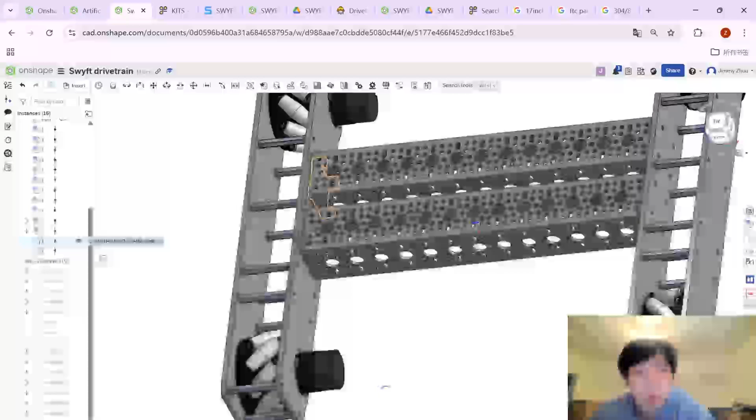Move the bar, the timeline bar. Where's the timeline bar? I mean, I guess it's still loading, so the timeline bar hasn't appeared yet. But assume it's working. Just refresh this.

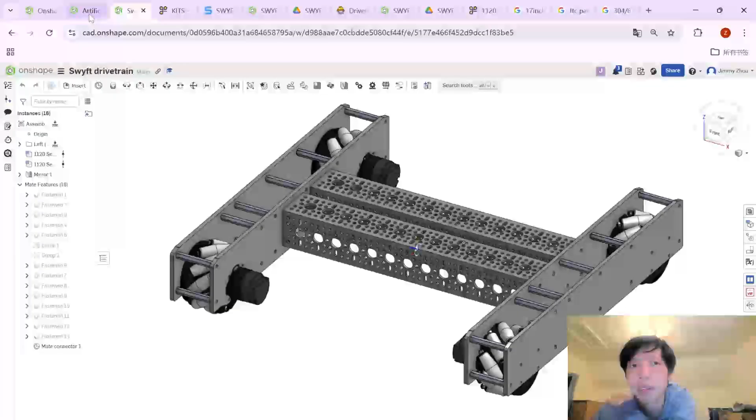Meanwhile, let's see motion, not structure. For a channel, for a 10-hole channel, or no, let's say we can just do a 12-hole channel. So 312. So we can replace this. Replace this by a 12-hole one. So this is the fun thing about Onshape, is that you can just replace parts that you don't like by another part that you think is going to work.

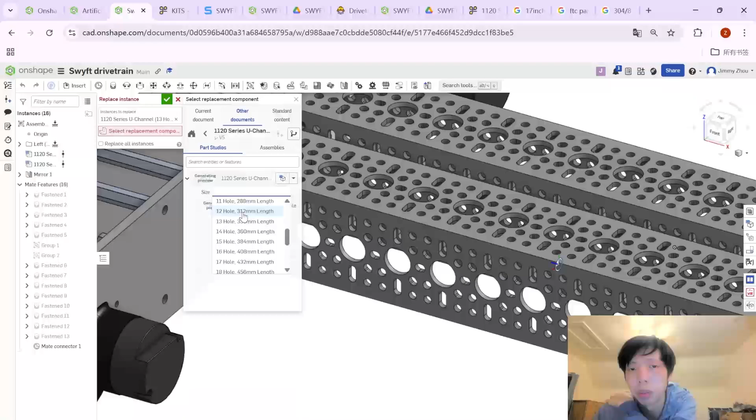So structure, channel. This was 13-hole, so we're going to do 12-hole. Yeah, sure.

And then we're going to do that too on this side. Edit and replace this with the 12-hole one. Where do I go here? Structure, channel, boop, 12-hole.

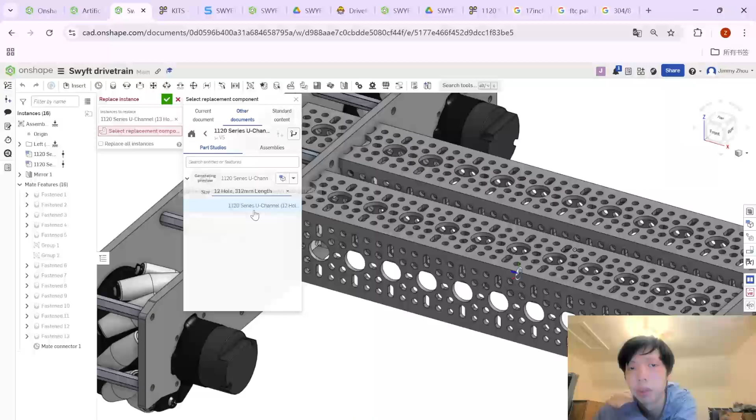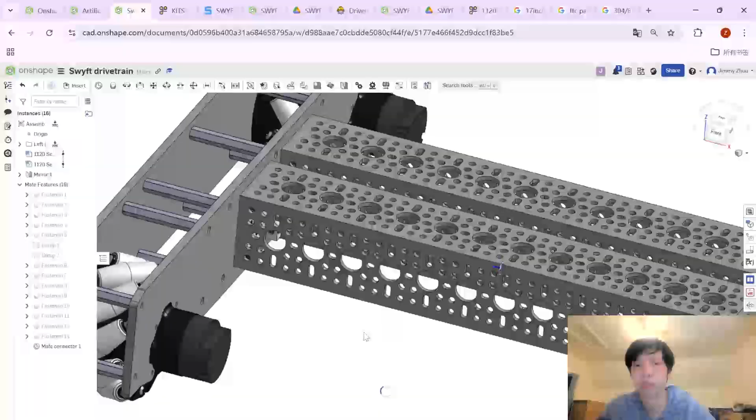Done. And then you need to kind of keep in mind this mate since you added this. Previously we moved it 336, so you need to move it negative 312 divided by 2. So this is going to fix the thing. As you can see now, we are in the safe zone. We are not out of the 457 by 457 thing.

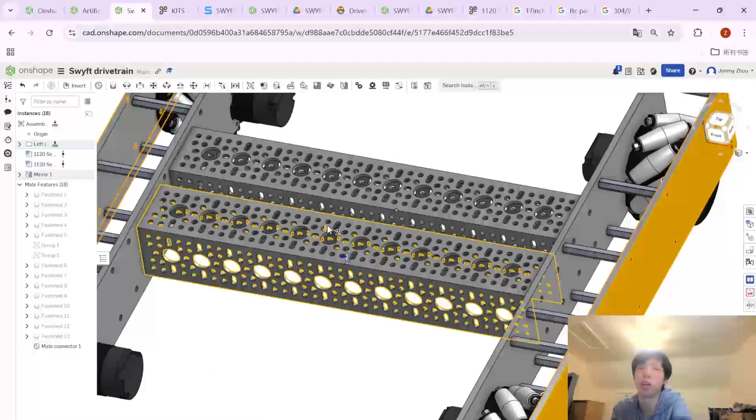Hooray. The reason why I made that mistake is that we originally used 3mm plates, not 5mm plates. So I guess that means in the design on the DECODE season, we had an extra 2 times 4, which is extra 8mm, which made the margin enough. In this case, if we use 5mm plates, then we need to reduce the size here. So yeah, the drivetrain is basically done.

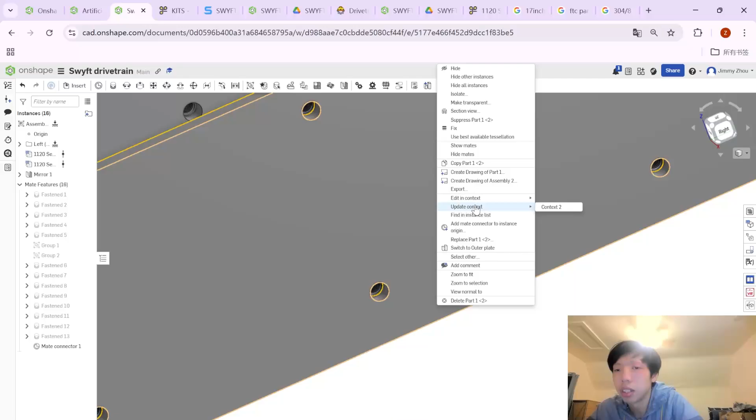So let's have some fun. Let's do some pocketing. So let's do edit in context. So there's this custom stroke tool called Cheese It. You choose it here, cheese it. So you can add it in by doing the add custom feature and just search for cheese it.

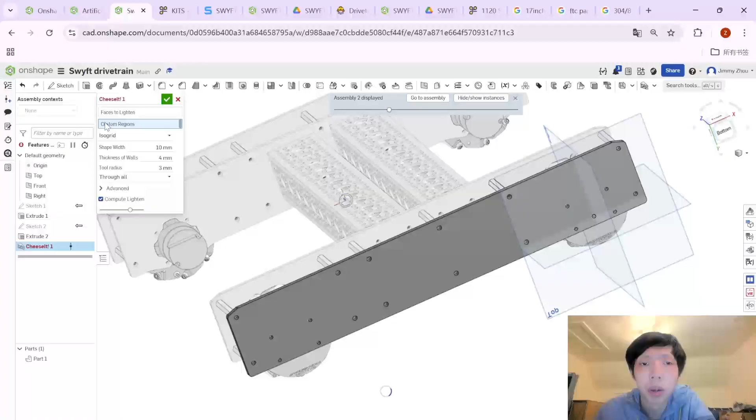So we choose the faces to lighten, which is the face that we want to pocket. Let's just ignore any, we don't need to do any custom regions. It's going to do it for us. We just need to wait for it to do its magic.

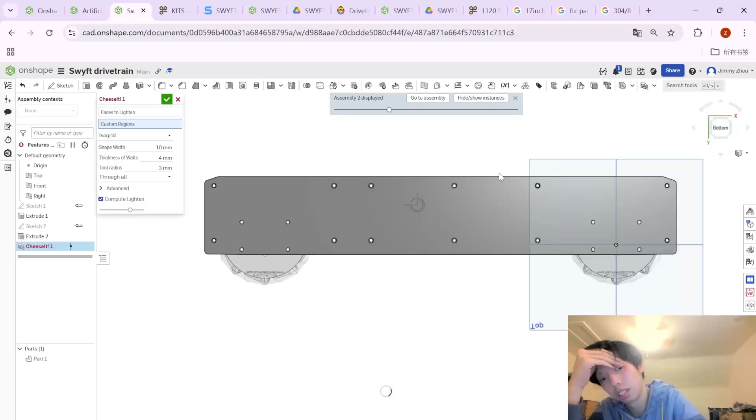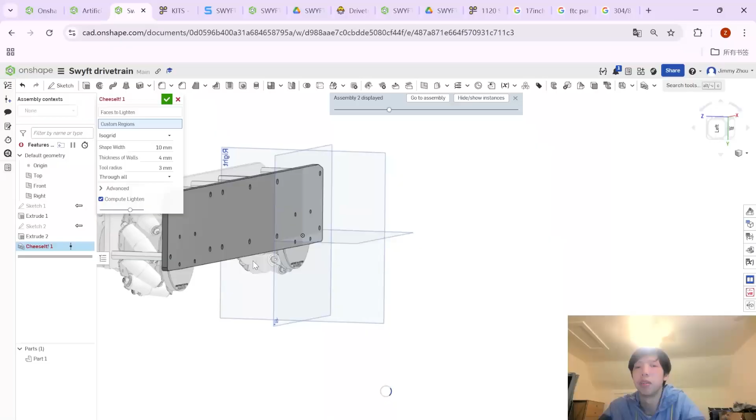Additionally, as you can see here, this is actually pretty far off the ground of the spaces. So essentially what you can do, if you want in your own design, you can move these up a little bit to make some more space. Like you're going to have to pattern this up and transform this part up too by a couple millimeters to create a little bit more space down here, or you can just add a chunk down here if you want, because I think the less wheelie part is shown, the more pretty it is.

But yeah, right now it has error generating. Why does it have error generating?

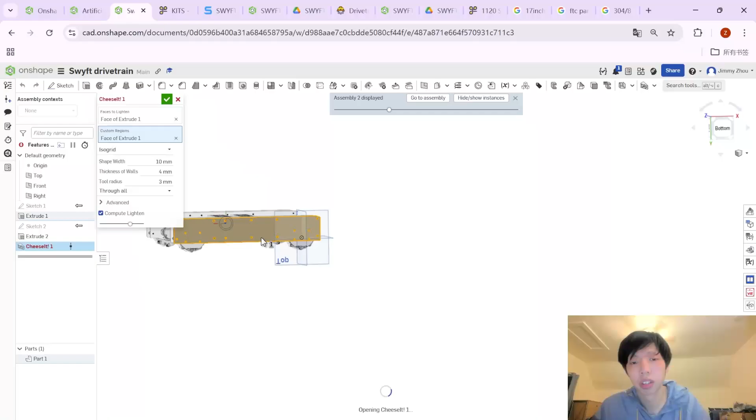But bro, you could do this, man.

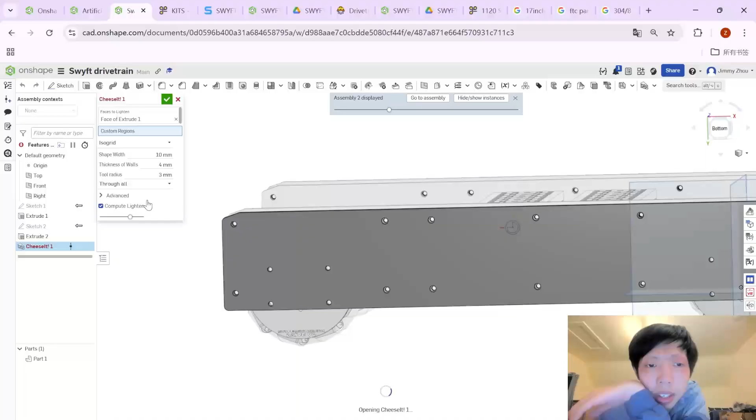Cheese It is not happy today. Oh yeah, sure, it worked now.

So as you can see here, we can do the shape width, thickness of walls, and the tool radius. The tool radius is basically when it's CNC'd, so there are going to be fillets here, for the tool radius. The thickness of walls is basically the distance between this and the shape width, you can see there's an isogrid, so the shape width is kind of like...

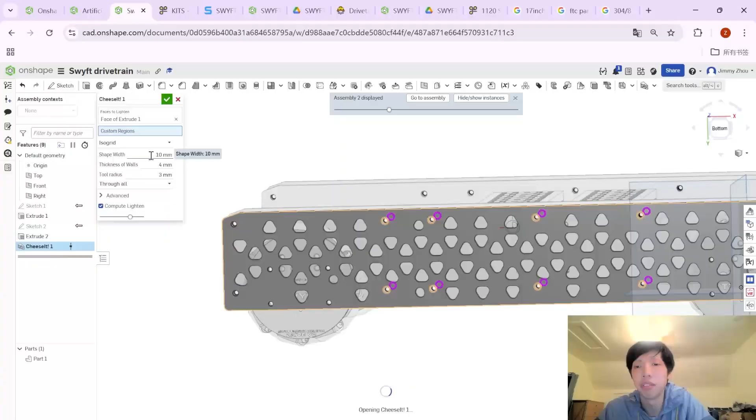Basically this is, I mean, it's just like the measure of size. It creates kind of a grid to use to generate these shapes.

So we can just make this shape larger. You can see this is a bit too ugly. So if we make this larger, it's probably going to be a bit cooler. It takes quite a little bit of time. So it needs to generate.

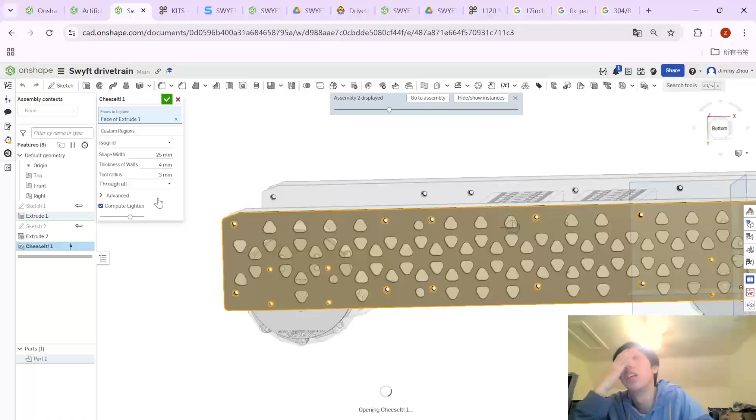Come on, man, you can do this. I believe in you, you can do this. You can do this. Yes.

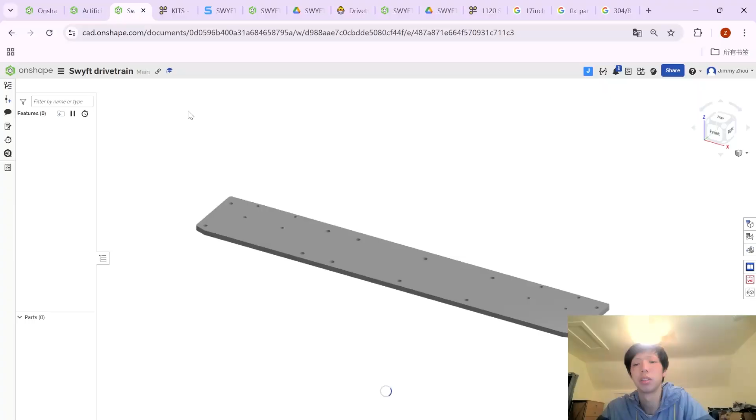Whatever, you can play with this yourselves. I'm going to refresh this. Maybe it magically finished, who knows?

Oh yeah, right. So I think these threads are a little bit too thin, so I'm going to make this 6mm threads.

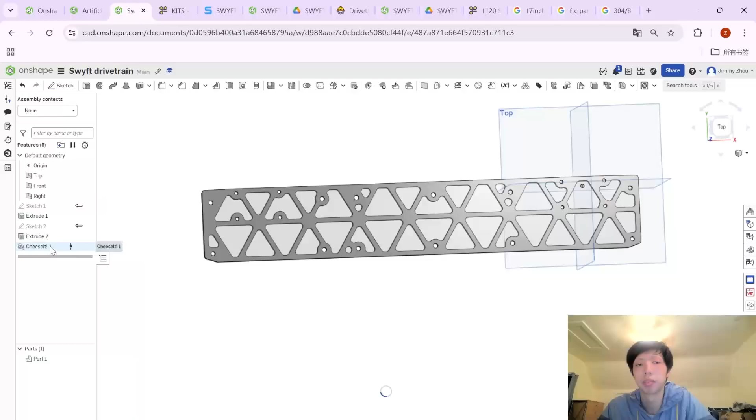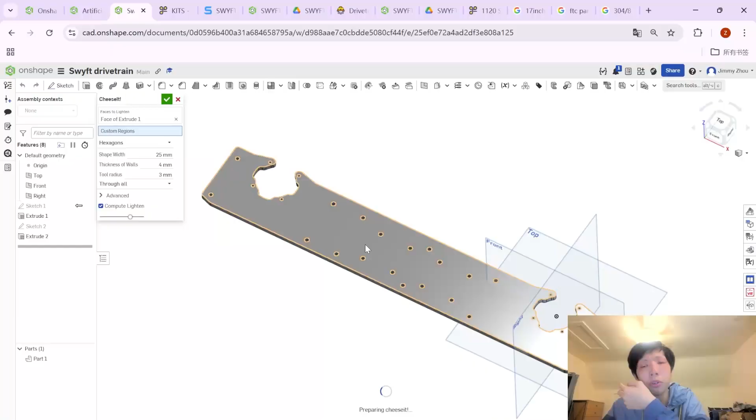Yeah, and right, then that's a pocketed side plate, and then you do the same for the other one. So you usually pocket when you're doing aluminum. You do not pocket if you're doing PC, so this is the final thing for PC. If you do aluminum, you need to reduce the weight, so then you pocket.

So yeah, just do the same thing again. It saves your preference. Why is this hex? Not hexagon, isogrid.

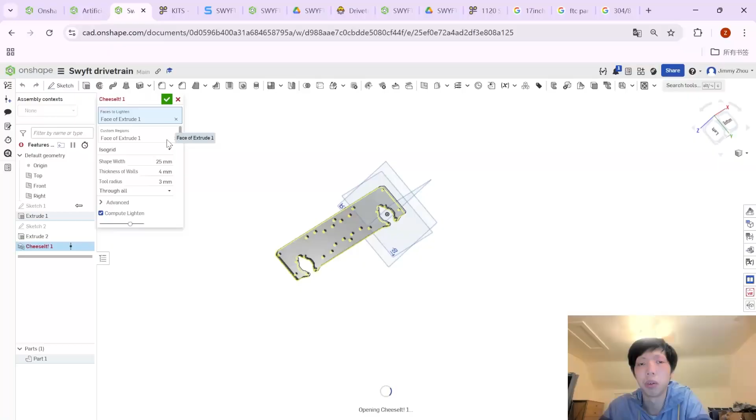And wait for it. You could do this on Onshape. Think faster, why did not generate properly? Think faster, I believe in you. Actually selected an extra custom region. We do not have custom regions, so ignore that.

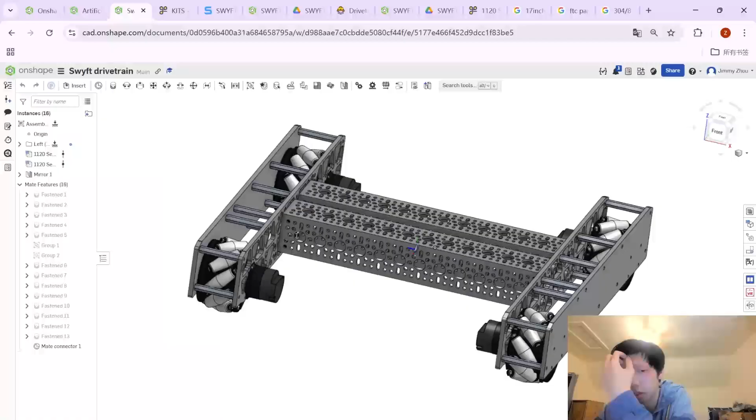And wait for us to do its magic. I wonder why it did not show on the outer side plate. Well, it showed up in the inner side plate.

Sometimes you just need to refresh. Let's go. Hooray. Now we have our cool aluminum side plate here. Very strong, out of aluminum with a lot of standoffs.

And well, yeah, here we are. And great, you've done this. Stuck with us through this very long tutorial. How long is this? I do not know how long is this, but yeah, you finished your parallel drive, Swyft drive.

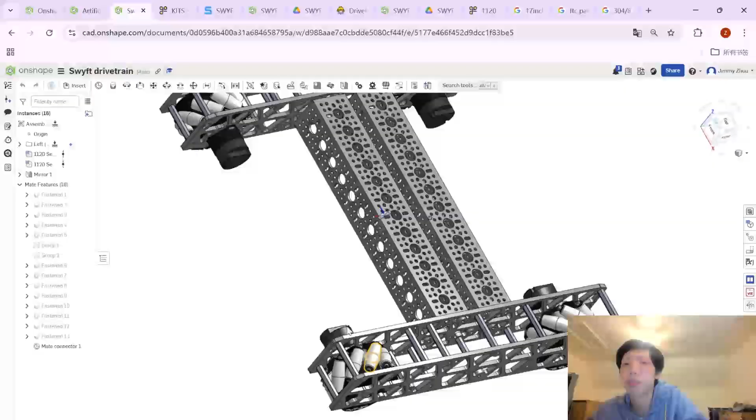So hooray! Actually, how long is this front to end? I'm just curious, I did not calculate this far in. I think it should not be more than 257. Well, 457, and I'm pretty sure it's not. So yeah, 408. So you can actually add like around another 40mm.